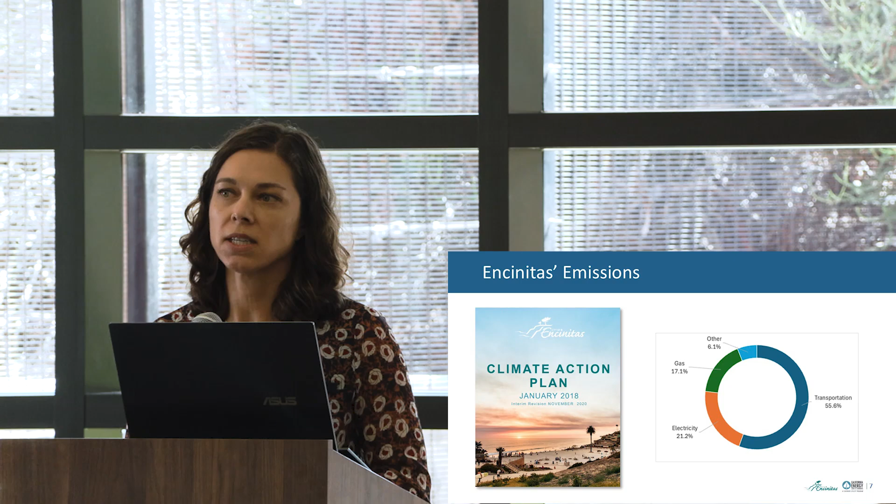The other large part of our emissions is actually from our buildings in Encinitas, and that comprises our electricity sources and our gas sources. The electricity source, when it's generated at the utility, whether it's at a natural gas plant or a renewable site like a solar farm, certain types of those sources are generating emissions. So the goal there is to reduce the off-site emissions, but then within the home, there are natural gas sources of emissions directly in the home, and that's where that 17% of emissions is coming from. So those two buckets are what we're really trying to target here today with the training in terms of reducing emissions.

And the way that we do that is through what we call in the Climate Action Plan, CAP measures. So what these measures do, we've got 20 total CAP measures, and what they do is try to reduce emissions in various ways through various efforts, whether it be projects or programs or initiatives or policies.

We're trying to get all of these things done to meet our local targets that we're trying to achieve, that we set in our climate action plan.

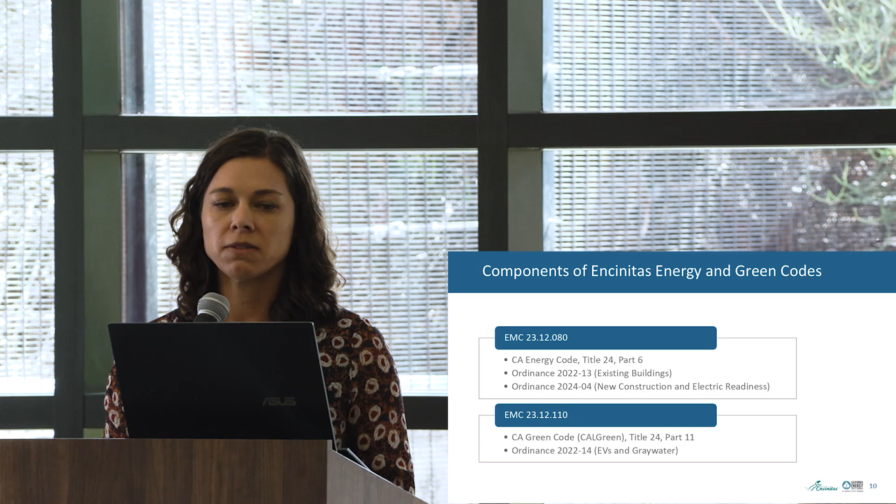So you'll find them in 2 places. Our REACH codes are located in our energy code, which is Municipal Code Section 23.12.080. In that code, you'll find existing building requirements and new construction requirements, and then also our electric readiness requirements. And then in Code Section 23.12.110, that is our green building code, and that's where you'll find the electric vehicle requirements and the gray water requirements.

Okay, so what is new with this new green building ordinance that we most recently adopted? So the main thing that occurred is we did have to rescind our prior all-electric requirement.

In place of it now, as part of this new ordinance, we've adopted a higher energy efficiency standard, a higher performance standard for certain new buildings, and also more extensive electric readiness requirements. So even if you are building with natural gas, you would need to be required to set up all the wiring and make the home essentially just plug and play for future conversion to electric appliances.

And then lastly, I'll just mention there were no changes on the other requirements, but they are all still in place in the codes. There's a couple other additions that we'll mention, related to the intervening code cycle, since the timing was very similar for our ordinance. So we will touch on some of the new EV charging requirements in the intervening code and new embodied carbon requirements. And then lastly, we'll briefly touch on the plumbing code section, where there's some new alternative pipe sizing methods.

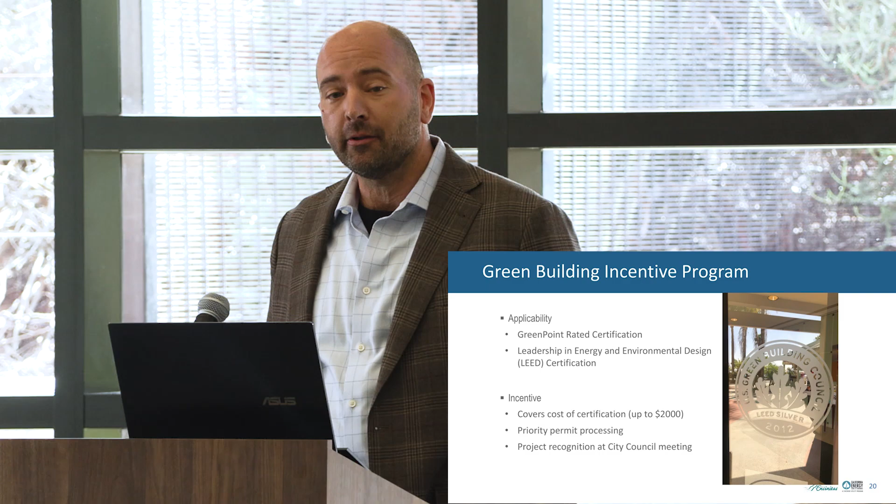I'm a HERS rater. I do the special testing that's been required in California since 2010, making sure your home or air conditioning works the way it's supposed to, not using more energy than necessary. I'm also the national version of a HERS rater, so I go out and score homes, measure how efficient they are, and figure out what can be upgraded. I'm a building inspector as well as a plan reviewer, and my primary job is training building departments for the utilities, SDG&E and SoCal Edison, on what the energy code requirements are, how to review plans to make sure they meet the energy code requirements, and how inspectors do inspections in the field to make sure the building was built to meet the energy code and isn't using any more energy than necessary.

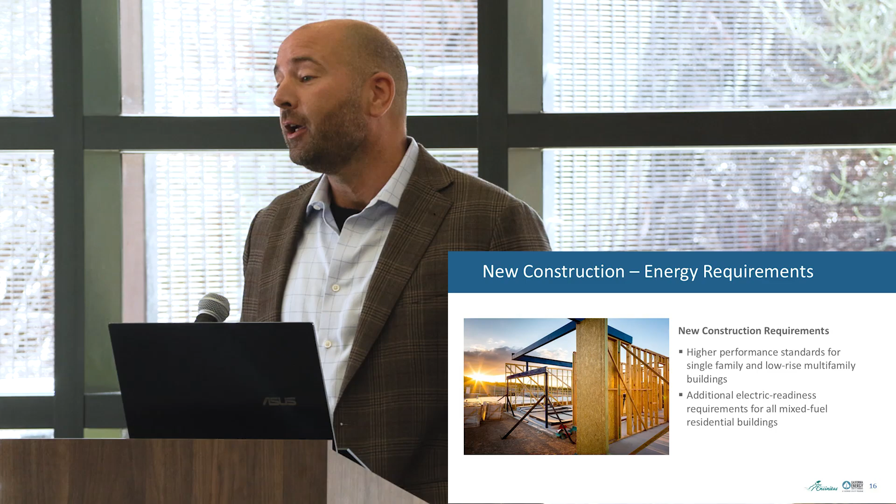There are additional electric readiness requirements for all mixed fuel buildings, which are part of the energy code right now. If you're using any propane or fossil fuel-based appliance like natural gas, you've got to size your electrical panel and service drop, leave reserve space in those breaker panels for that future electric appliance, and actually run the conductors from the electrical panel to the location of where that planned appliance is going to be.

Additions or alterations are considered new construction if more than 50% of the roof framing is removed, if more than 50% of the exterior bearing walls or columns are removed, or if the proposed conditioned area in an addition or alteration more than doubles that of the existing building's conditioned floor area. Keep in mind these are specific to Encinitas and are actually in the ordinance, with slightly different definitions and requirements when outside Encinitas, not part of the REACH code.

So for new construction, single family duplexes and townhomes, all electric is strongly encouraged. Again, it can't be required because that's superseded by federal requirements, so it's not allowed, but it is strongly encouraged.

So what we're looking at is a source energy score, an EDR, that's energy design rating. It's part of what gets populated on your compliance documents, the energy calculations you have to generate for the building department. What we're looking for there is that the source score is 4.5 or better. In other words, if you're just building down to the minimum for the energy code requirements, you're gonna have to exceed that by at least 4.5. In a couple slides, I've got an example of what that looks like on the compliance documents. We'll show you that as well.

The exception will be dwelling units 1,500 square feet or less. And again, electric readiness for mixed fuel buildings. So we've got a note here about having a condenser location for a future heat pump heating and cooling system. For example, if your building is heat only, it doesn't have air conditioning currently, you're gonna have to designate a location on that building for the future for a condenser to be located outside. So if they want to switch over from that gas heating, they're gonna have a location, the wiring pre-planned for that condenser for that heat pump type system.

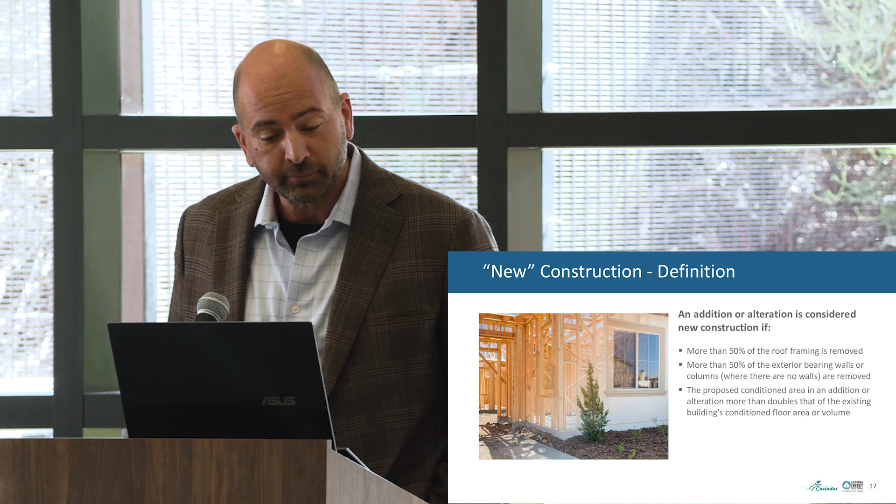All the other energy code requirements as far as electric ready apply as well, which means your water heater being heat pump ready, your space conditioning, the cooktop and the dryer, that if any of those are fossil fuel based currently, again electrical panel space, the wiring, the service, everything has to be pre-plumbed, pre-wired and ready for that.

One thing to keep note of on that is if you're using, for example, a gas water heater right now, heat pump water heaters, which is what the future is and what the state's really pushing, need a condensate drain. So that's something a lot of people aren't considering because you've got a fan blowing air over a coil. There's going to be times a year that the air is warm and humid and that coil is going to be below the dew point, so you do get condensate coming off that heat pump water heater. Now it's not condensate like if you have a condensing furnace where it can't be drained to the grass or anything like that, so it's not going to be acidic, but you just need to be aware wherever that future heat pump water heater location is going to be, you need to keep in mind that you need a condensate drain that will flow away from that.

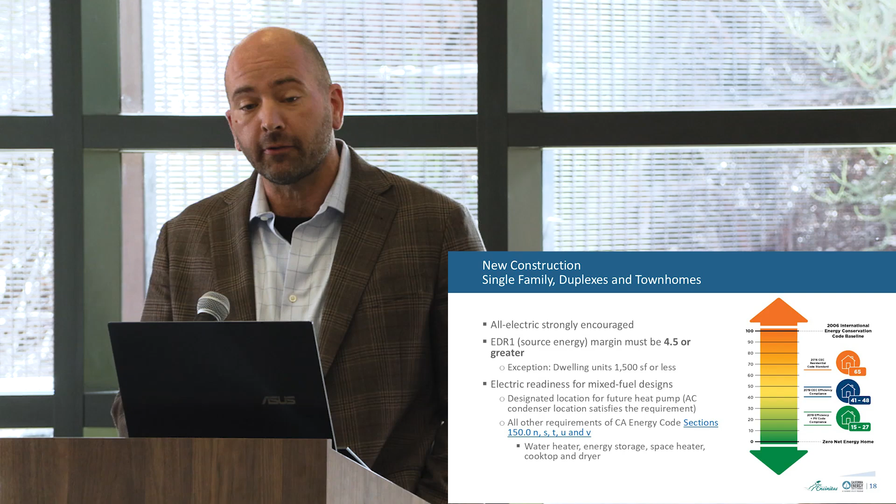Okay, so basic code right now would call for solar photovoltaics, and hopefully everybody's aware that anything new construction this code cycle, non-res, low-rise, high-rise, single family, if it's new construction, requires solar photovoltaic. In the base code right now, the climate zone we're in calls for a heat pump water heater, and it would still allow a natural gas furnace with a standard split direct expansion air conditioning system. So what you would see if you put that into the energy calculation to show compliance, your EDR score is not going to be very high. It's going to be just over what you need to pass.

What is PV? PV is photovoltaic, so solar electric on the roof.

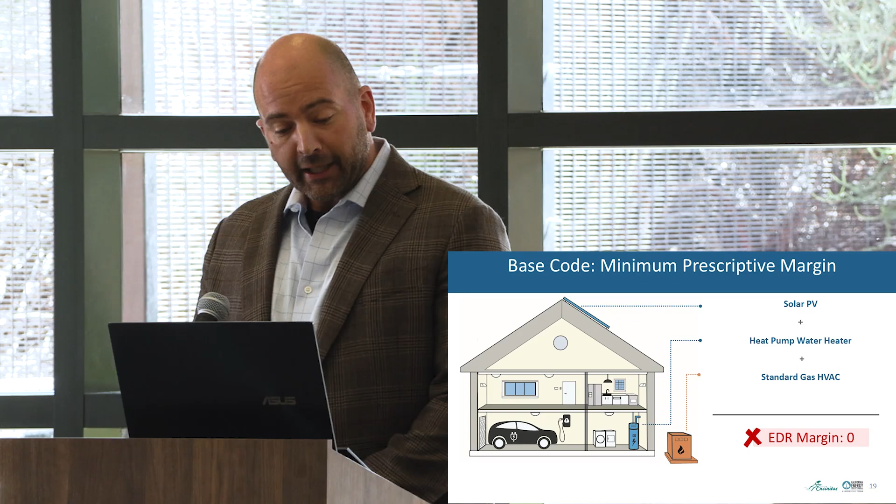The SEER rating that they used to rate equipment under was only using 1/10 of an inch of static pressure to measure the fan energy, which means there's no filter or ducts basically hooked up to that air handler. It's just plugged in and running.

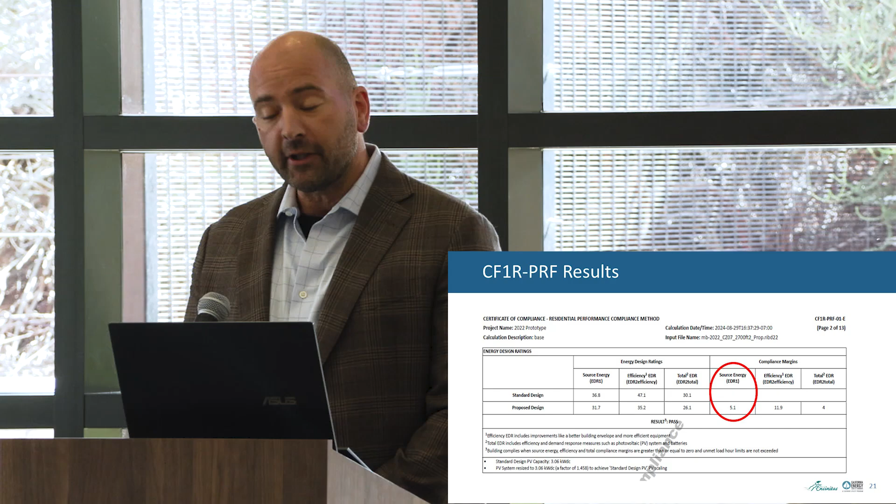New construction multifamily, so again, all electric is strongly encouraged. We're talking about 3 stories or less. Source energy margin must be 8% better than standard - you have to be 8% positive on your carbon score.

Mixed fuel multifamily buildings have to be electric ready again, and that's just part of the base energy code anyways. Any place you're using a fossil fuel based appliance, size the electrical panel, provide the wiring.

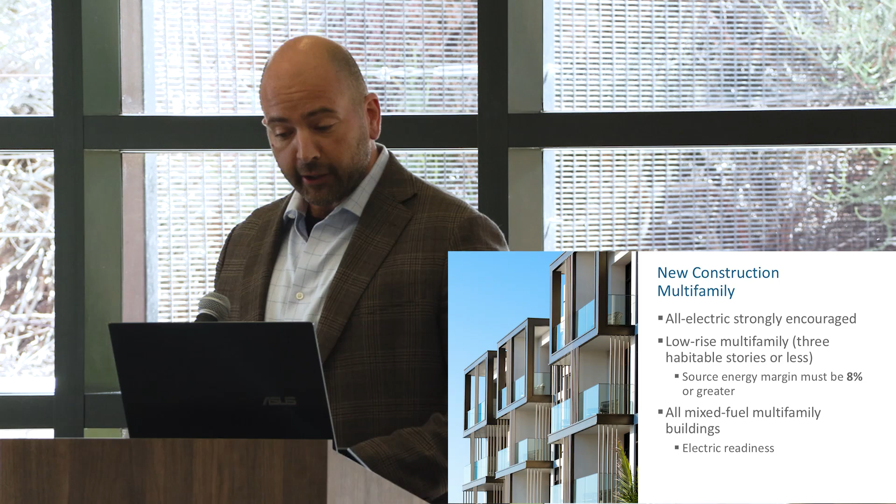These are examples of multifamily packages that would get us 8% or better. So the first one, the all electric: we're using a central heat pump water heating system.

The air conditioning system is going to be a heat pump. By the way, if you're not familiar with heat pumps, all air conditioning systems are heat pumps—we've just been using them in one direction for the last 20, 30 years, only moving heat from inside the house to outside. The only difference between an air conditioner and a heat pump is it's got a reversing valve. It can reverse the flow of refrigerant to use the indoor unit as the condenser instead of the outdoor unit, and therefore it can move the heat into the building.

So heat pump heating and air conditioning, 14.3 SEER2, and then the prescriptive envelope measures, which give you minimum U factors and require advanced walls—meaning a frame wall with cavity insulation plus continuous exterior insulation on the building. So that gets us to 28%.

All electric plus an 80% photovoltaic offset. So again, central heat pump water heating for all the units, heat pump HVAC at 14.3 SEER2, and then sizing the PV to offset 80% of the electricity usage in that building. And again, prescriptive envelope measures. That gets that source number 52% better than standard.

Last option, if we're going to do mixed fuel, then we're going to size the PV system to offset 100% of that building's electricity use. Central gas water heating—federal standards say that's minimum 80% efficiency. 14.3 SEER2 heat pump heating and air conditioning. And then again, sizing your PV based on the occupancy of the building to offset 100% of electricity use, and meeting those prescriptive envelope requirements from the code, that's going to get you to 11% better than standard for that carbon score.

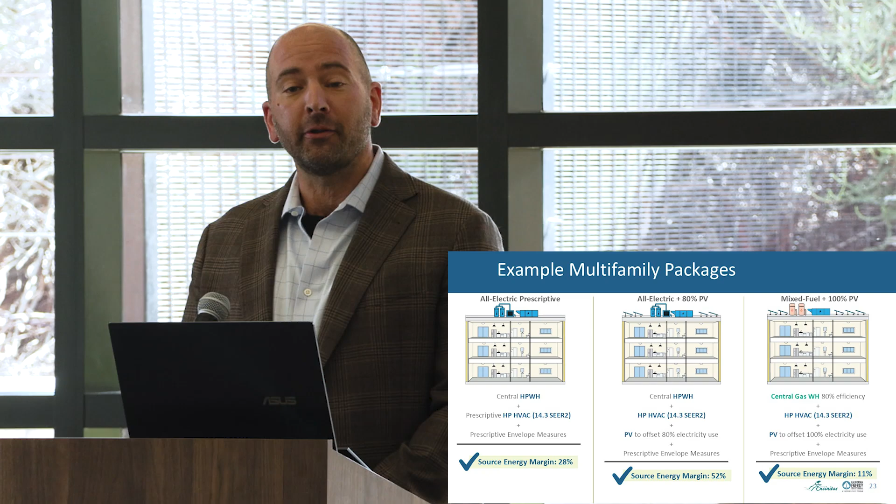By the way, I know I talked through a lot of this fast. We'll have a question and answer session afterwards, and I'll put up my contact information as well in case you have questions into the future. We're going to be here to support you, your clients, or the contractors that be.

So, new multifamily electric readiness requirements under the state code: instead of having a central plant providing hot water for all units, if you have one water heater in each unit, the energy code requirements allow different types of water heaters, but one thing you do have to do is make it heat pump water heater ready. That means reserving a 240 volt, 30 amp breaker space in the panel and providing a 10-3 wire from that panel to that location.

So for example, if they have a gas water heater right now, they're only going to need a 120 volt, 20 amp breaker. They're going to still run that 10-3 wire, but then the red wire is going to be marked off, tagged, reserved, future 240 volt domestic hot water, both in the breaker panel and out at that outlet box by the current water heater.

The panel, the way it's organized, you can't just gang all the breakers together at the top. I started my career as an electrician—we want to make those super neat and tight and have all the wires have nice angles on them.

Well, you need to leave a space below the one for the water heater right now, because in the future, when the client wants to put in that 240 volt, the breaker space immediately below it needs to be marked off, reserved, future 240 volt domestic hot water, same as the wires. That way when somebody comes in and takes out that 120, they can just slap a 240 volt two-pole breaker in there.

And that's important because if we gang all the breakers up at the top of the box, for example, a homeowner might decide they want to put a welder in the garage—they build dune buggies. They see all the extra breaker space in the panel, they're going to use it up. Then they decide to put a spa in the backyard. If they use up all those breaker spaces for other things in the house, and then it comes into the future where they want to adopt this technology, they're going to have used up that breaker space. So these aren't empty, they're not spares—that panel has to be organized and labeled so it's ready for future uses, getting from both phases of the electricity, not putting one 120 someplace and another on the same phase.

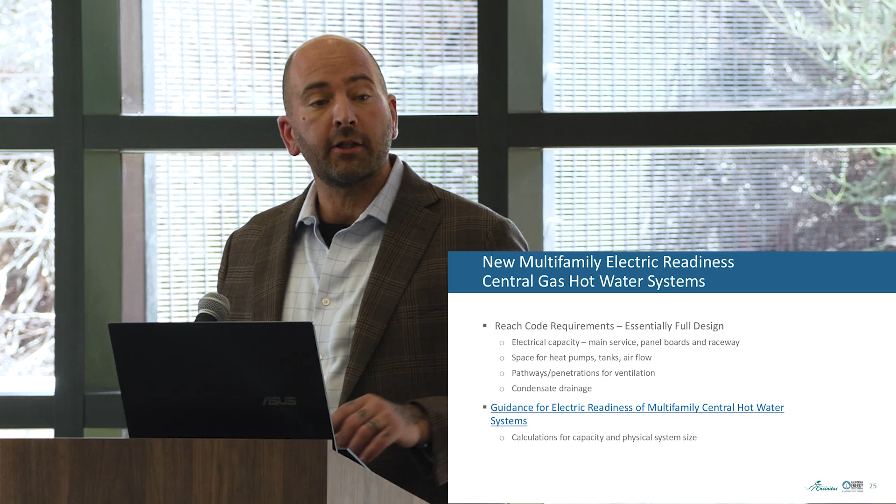There is a credit for certified energy analysts. They're not state certified, they're certified through CABEC. But if you use a certified energy analyst, they give you one point of credit on single-family homes and 1% credit on multifamily homes for having a certified energy analyst do the calculations showing that your building complies.

Okay, questions and discussion? I covered it so well you're all blown away, or speechless? You don't have to ask questions right now. I'll hang out here afterwards, we'll put up my contact information, and we've got a lot of information over at the booth. I'll be out here as well. So no questions yet? I'll keep hammering through.

Yes? Property currently has a gas meter. When you go about it, can you get rid of that gas meter, or can you incorporate gas accounts?

So just to be clear, you're saying you're going to do an addition or build a new ADU and your property already has gas, demoing it, building it. So taking down an existing building and putting up a new one, and the property's already served with gas. That's going to be up to you because they can't tell you you can't use gas, but if you are going to use gas for appliances in that building, you're going to have to make that building electric ready and then make it efficient enough that you're basically offsetting the greenhouse gas emissions from that natural gas use.

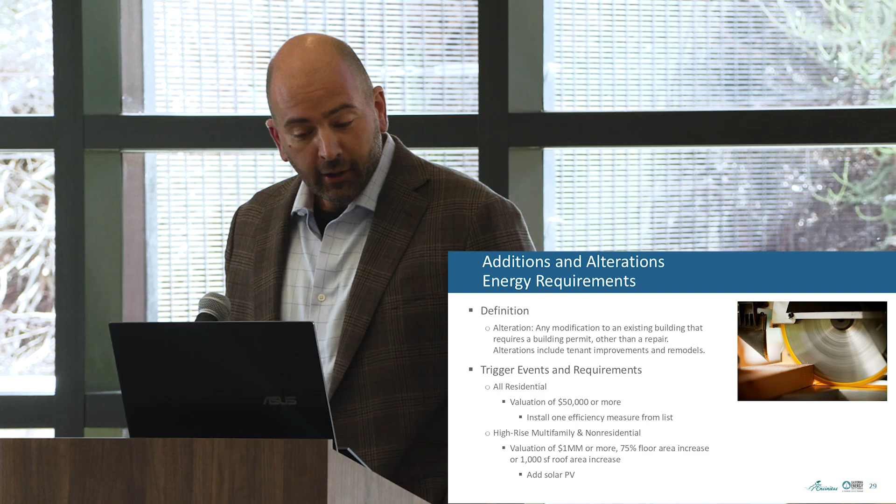So the triggers in the requirements on residential: a valuation of $50,000 or more. You're not really triggering a lot of this on something as simple as an air conditioning change out or a water heating change out. But if you have a valuation of $50,000 or more, they're going to ask you to install one of the measures in the list, and I'm going to show you the list on the next slide.

High-rise multifamily, non-residential: valuation of $1 million or more, or a 75% increase in floor area, or a 1,000 square foot increase in roof area, and you're going to be adding solar photovoltaics to that project as part of your requirement.

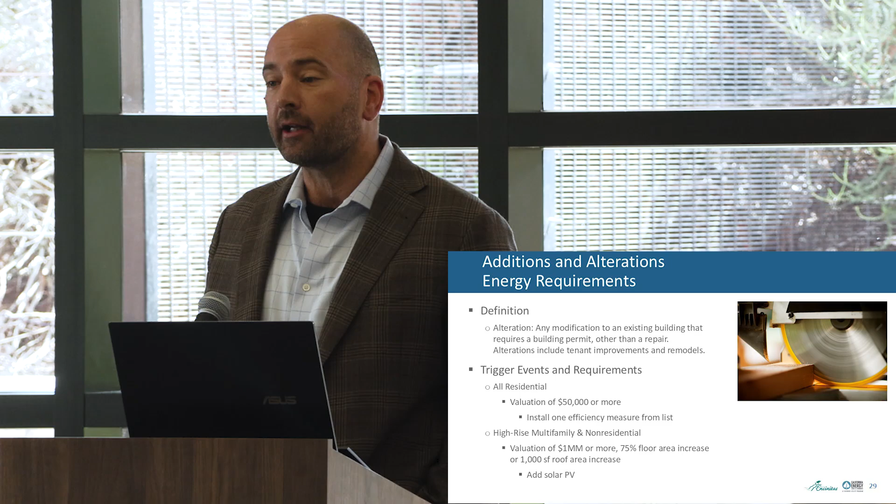From 1978 to 1991, you've got a different package of measures you can apply. And then after 1991, they take off things like windows and wall insulation, because there was already minimum mandatory requirements around those windows and walls, so that changing them out might not offer that much improvement versus these other measures. But there are things like LED lamps, vacancy sensors, the water heating package, a cool roof, R38 attic insulation and air sealing.

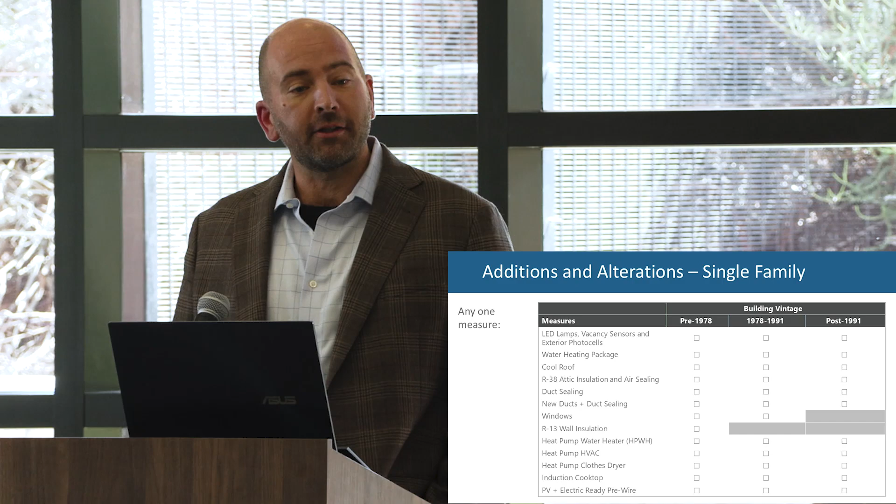I won't read these all off to you, you can read them and go through the checklist on your own, but basically some of the more common measures you'd want to do to an existing single-family home if you're doing significant work on it, because you want to improve these areas anyway while you're doing the work.

Additions and alterations, high-rise residential, non-residential solar PV: so if we increase the roof area by 1,000 square feet, valuation of $1 million, that affects at least 75% of the gross floor area. Option 1, greater than or equal to 10,000 square feet, you're adding 15 kW per 10,000 square feet of floor area. If we're less than 10,000 square feet, then you only have to do a 5 kW DC photovoltaic system.

The other option is you could comply with the current energy code as if it was new construction. So the current energy code is a calculation based on the occupancy and the climate zone, and you multiply your square footage by the factors in that calculation, and it'll give you one requirement. Then there's also another requirement to take the available roof area and multiply it times 14 watts per square foot of available roof area. Whichever number comes up smaller would be your energy code requirement for a solar photovoltaic system. So it's whichever one you choose, either the minimum based on your square footage, or using the calculation in the current energy code for new construction.

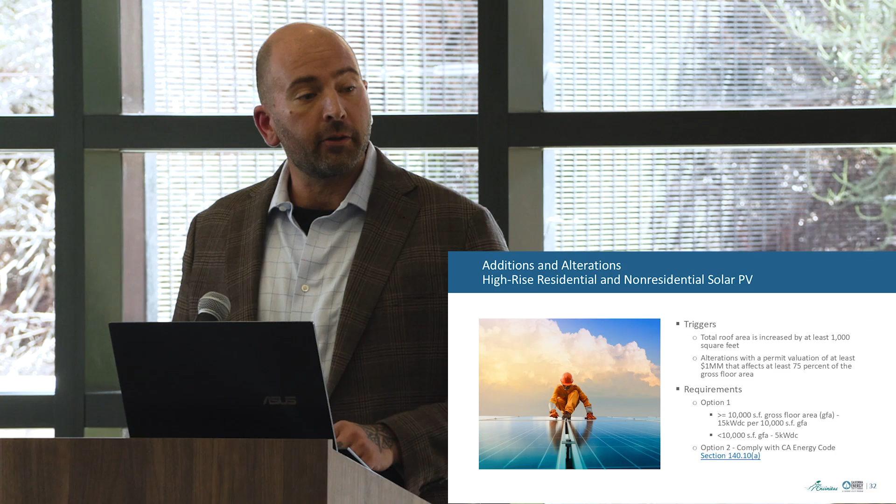Okay, electric vehicle car charging requirements. There's definitions first. Level 2 EV space: a parking space equipped with a fully operational level 2 electric vehicle supply equipment, meaning the wiring, the circuits, the charger, everything's there except for the car. EV ready: we've got wiring from the electrical panel going to the parking space, so there's a receptacle in there, but there's not an actual charger in that parking space. There's low power level 2 receptacles as well.

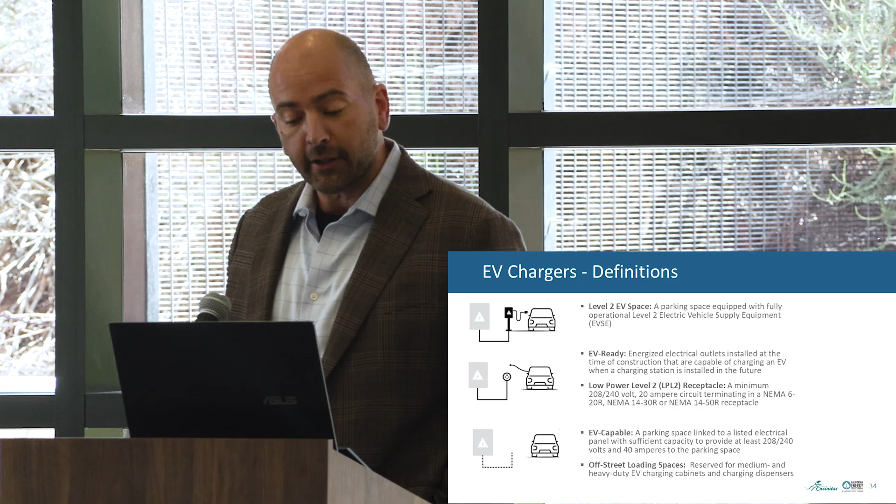This is kind of where the Cal Green code gets a little wonky in my mind, that usually level 2 is a 40 amp, but they allow low power level 2 chargers, which are 20 or 30 amp chargers instead of the 40. So if your project qualifies for that, that would fall under EV ready. And then EV capable: a parking space that's linked to a listed electrical panel with sufficient capacity in that electrical panel to service drop to provide that 240 volt, 40 amp circuit to that parking space. In other words, the conduit, the pull boxes, everything except for the wiring and the actual breaker in the electrical panel.

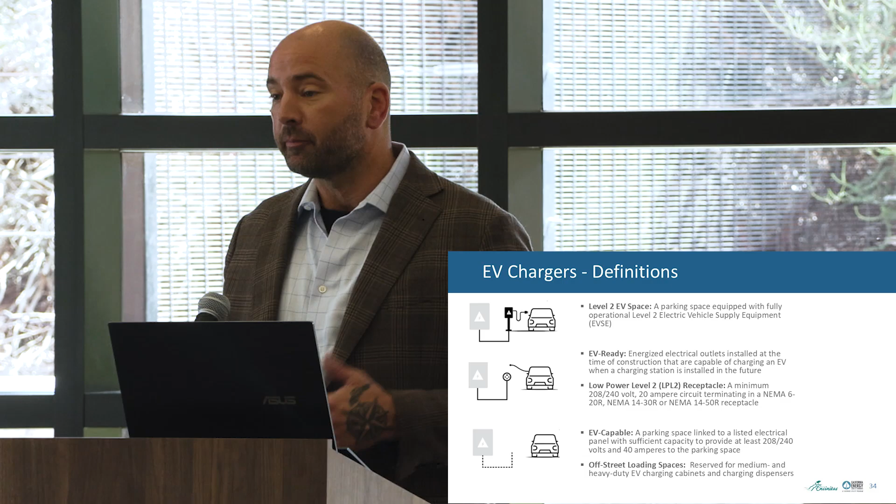If you have loading docks, so you have like a retail store or a warehouse store where big trucks are going to be coming in, then you're going to trigger the heavy duty EV charging, which means for medium and heavy duty electric vehicle car charging, you're going to have an additional requirement for those loading docks so those trucks can charge whether being loaded or unloaded. Those are significantly larger than level 2 chargers, usually 400 or 800 amps, so you'll deal with that based on your project needs when you go through plan review.

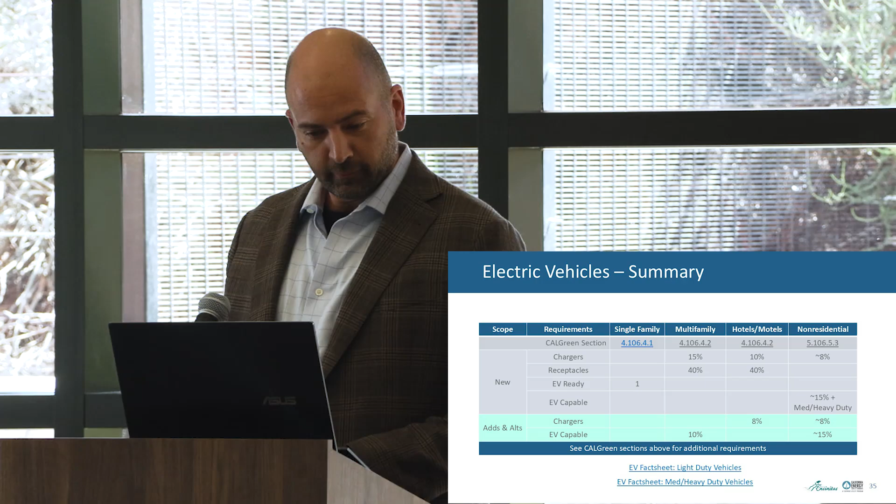Questions on EV or solar photovoltaics? Or anything I just talked about. You guys are easy.

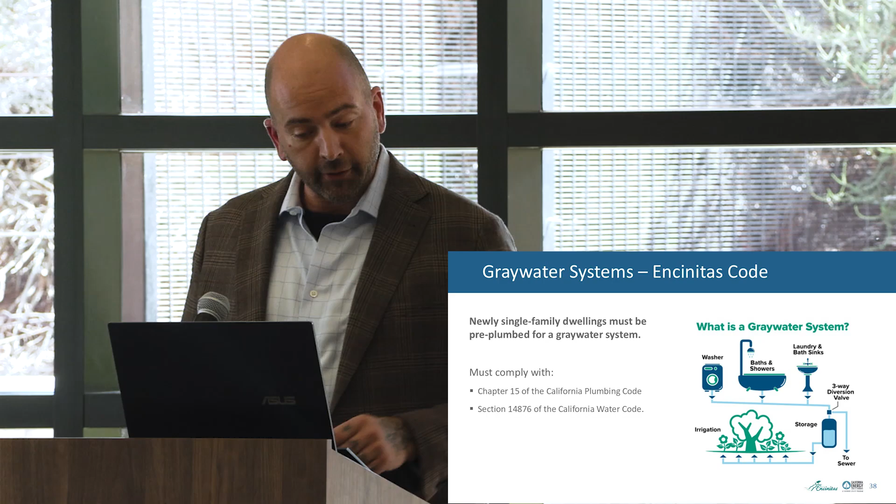So, pre-plumb for gray water, with connection integrated with the landscape irrigation, accepting gray water from all the sources permittable, like bathtub, showers, bathroom wash basins, washing machines, and laundry tubs, but not including wastewater from kitchen sinks, dishwashers, or toilets.

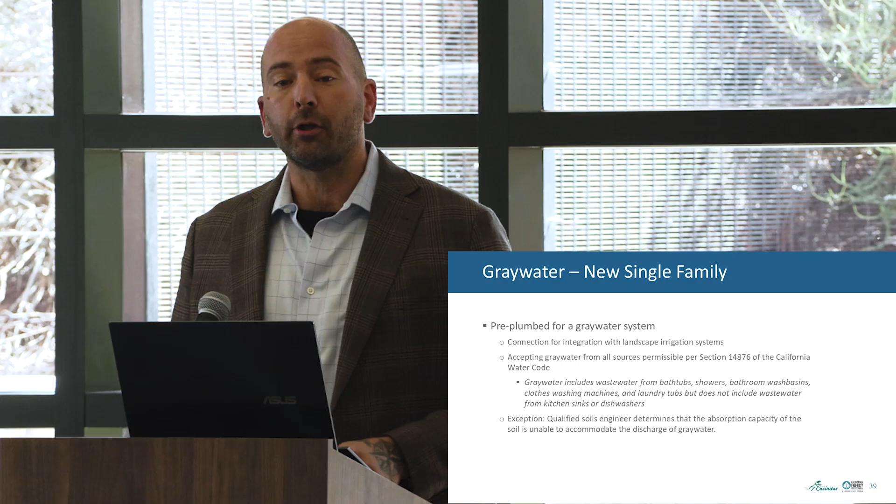Exception: if you have a qualified soils engineer that looks at your soil and says it's solid rock, you're on bedrock, and there's no way the earth can accept this additional water from your gray water system, then you'd be able to get an exemption, but you'd have to provide the soils analysis proving your ground isn't permeable enough to accept the output from the gray water system.

Embodied carbon, for new construction and adds and alts. CalGreen requires that projects greater than 100,000 square feet demonstrate a 10% reduction in global warming potential using the ISO methodology, or install only products that meet the prescriptive global warming potential standards. This means CalGreen and other sources have lists of materials and their global warming potential, so you need to select your materials based on that.

Paints, mastics, drywall mud, all those things are included. Or there's a reuse option instead, for additions and alterations, where you're reusing existing building components instead of throwing them away and buying new ones.

So there's an alternative: either use the list and find materials that meet requirements based on global warming potential, or reuse as much material as you can from the existing building. Adds and alts projects greater than 100,000 square feet must maintain 45% of the existing primary structural elements, or achieve a 10% reduction in global warming potential of the materials used instead. So it's either or. Again, the embodied carbon CalGreen requirements, that's a link - I'm sure if we send this as a PDF there's a way to grab the links from the presentation, so you'll be able to click on these and access additional resources.

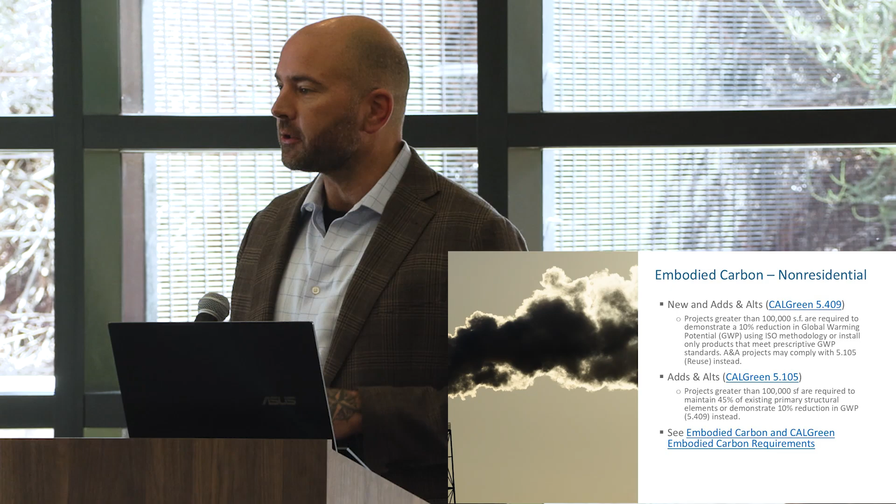Alternative pipe sizing calculation - it's been 80 years since the plumbing code was written as far as determining water requirements for fixtures, and it hadn't been updated. It's called the Hunter's Curve, and that's finally been updated for the first time in 80 years - what you have to size your plumbing distribution to for your fixtures. When you think about the low flow requirements we have on our toilets and fixtures everywhere else, it's kind of crazy they haven't updated this sooner. But it's Appendix M of the UPC, and it allows for reduced pipe sizing in single-family and multi-family dwelling units.

These will be links so you can click through and find them. When you go to their website, they actually have an Excel spreadsheet you can fill out based on your structure, and that'll do the calculation for you to tell you what your allowed pipe sizing diameters are, and what your fixture counts are going to be for your dry and wet venting as well.

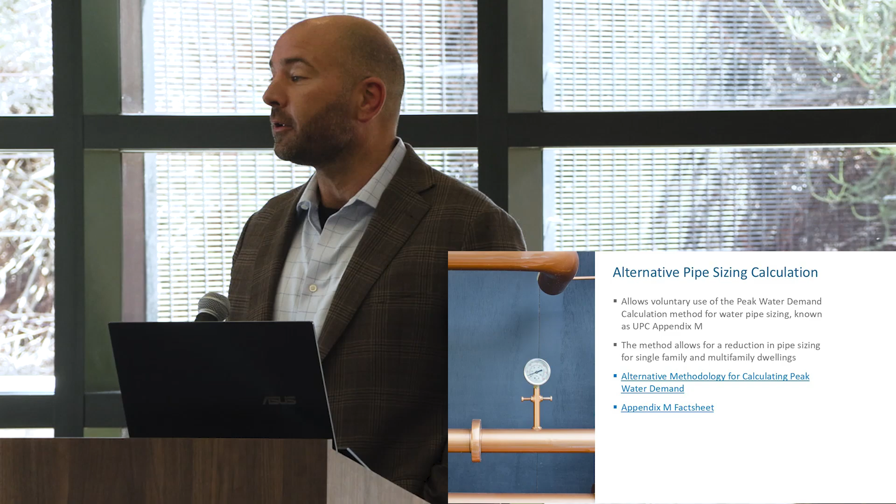But you're going to have reduced pipe sizes, you're going to have reduced thermal waste because these pipes aren't going to have as much water in them that cools down every time you take a shower or wash dishes. So there's a lot of advantages: lower material costs, less energy losses, and again just a more efficient building - because why do you need a 3/4 inch line if you're only allowed to take 1.2 gallons per minute out of that faucet?

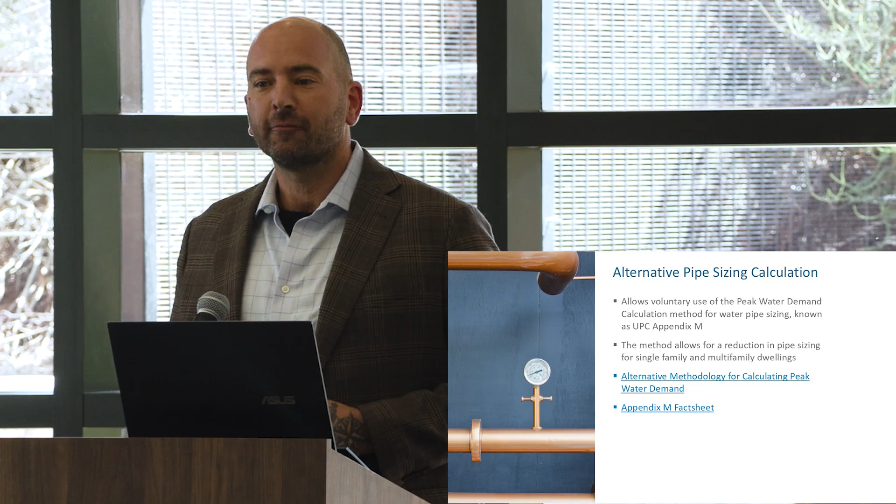Okay, the permit compliance process - we've got a single-family, multifamily, non-residential green building checklist, so you're going to want to get these from the City of Encinitas. Based on what your project is, review your project against this, make any updates as necessary, and then submit this checklist with your plan set to the city so they can review it. They're going to have their own checklist as well, but you need to see all these checklists first, because it's much better to get through plan review quickly and cleanly, versus having to do plan review by correction.

So, resources - again these will hopefully be hyperlinks when we send this out. There's the California Energy Code on the California Energy Commission website. There's the CalGreen Code, which is on Housing Community Development's website. There's the California Plumbing Code, which has online versions as PDF, but if you're going to be dealing with it a lot, I'd recommend just buying yourself a copy, because that'll make it a lot easier. And again, Energy Code Ace - our Title 24 trainings and resources.

Energy Code Ace, we try and take the code and all these requirements - there's over 3,000 pages now between the Energy Code, the compliance manuals, the joint appendices, and the reference appendices. So for a lot of people that don't deal with this all the time, that's overwhelming, and a lot of it references other things, other codes. So what we try to do with Energy Code Ace is boil those requirements down to a couple pages, put it on a fact sheet, add some pictures, make it glossy and colorful, and then put in hyperlinks to those other reference documents or national standard setting organizations when those apply. So please don't struggle with just looking at the black and white from the Energy Code or the Commission - I'd always recommend going through Energy Code Ace first. If you can't find the answer there and you're still struggling with the code, please reach out to me or somebody else, and we'll be happy to help you.